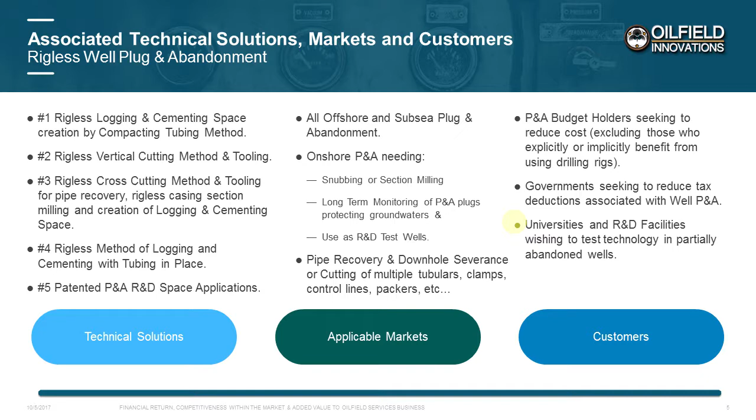Customers for Oilfield Innovations technologies are P&A budget holders, excluding those who benefit from the use of drilling rigs. Governments seeking to reduce tax deductions for P&A, as well as universities or R&D centers wishing to develop new technology, are also very interested in our patents.

In a nutshell, all oil and gas wells are 80 to 90% liquid space within the internal diameter of the casing. Vertically cutting and/or weakening one joint of tubing allows another joint of tubing to be pushed alongside it to achieve at least a 50% compaction rate. In other words, 200 feet of tubing can be compacted into 100 feet of space to leave 100 feet of unobstructed space for in situ cement logging and abandonment cementing.

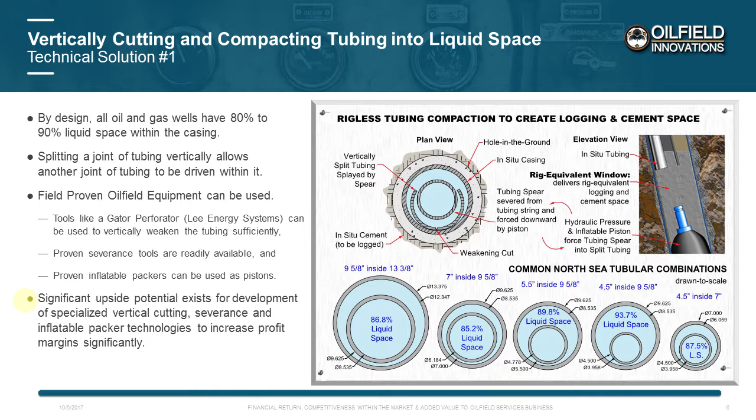One joint of tubing can be pushed alongside another split piece of tubing using an inflatable packer. The remaining uncut tubing can facilitate plug and abandonment cementing. In the short term, field-proven oilfield equipment can be used, and in the longer term, specialized, more efficient equipment can be developed. Humanity has reinvented uses for the wheel throughout history.

We propose using field-proven cutting wheel technology deployed on a skate and hoisted up and down to vertically split the tubing. The tool body can also use a cutting wheel to reduce the friction and partially cut the tubing to create a hinge-like effect that minimizes the force necessary to push one joint of tubing alongside a split piece of tubing.

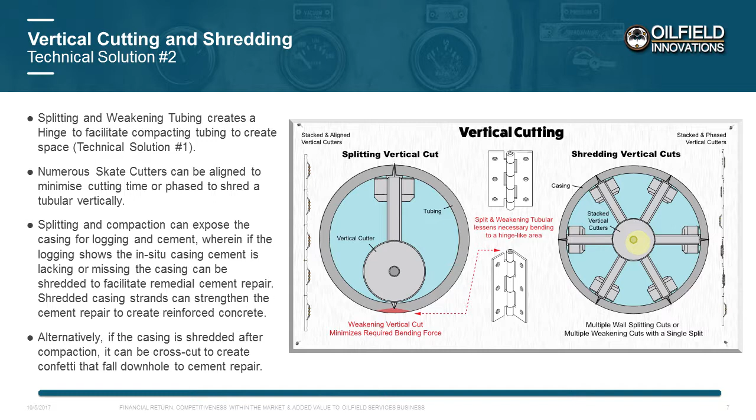Such a tool can also be stacked and aligned to place numerous cutting wheels along a single path to minimize the cutting time. Alternatively, the same tool can be stacked and phased to shred the tubing in many different tracks when lifted up and down.

Vertical cutting using proven cutting wheels can be combined with cross-cutting using a diamond wire filament for in situ casing cement repair and/or rigless casing section milling. Vertically shredding and then cross-cutting turns tubulars and other equipment into confetti that falls downhole. Cross-cutting the tubulars is not necessarily confined to rigless P&A and may be used in rig-based operations to save rig time.

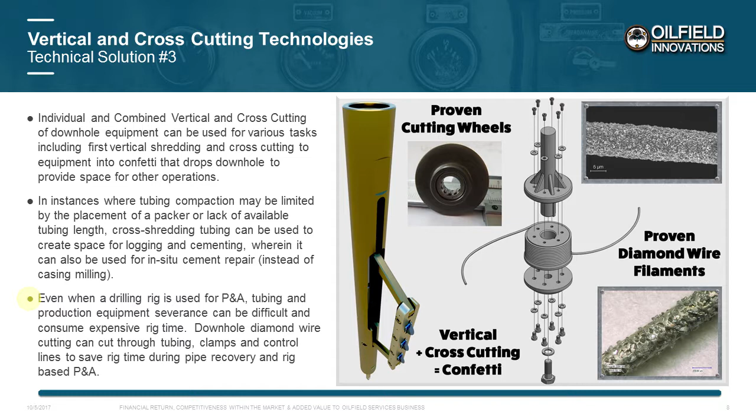Oilfield Innovations' patented diamond wire filament cutter, unlike conventional cutters, can cut through tubing, clamps, control lines, packers, casing, and other equipment deep within an oil and gas well to create space for logging and cementing during P&A, or, alternatively, rig-based retrieval of equipment. Oilfield Innovations have also patented technology for logging and cementing that leaves the tubing in place.

Driving spikes through the tubing into the casing both centralizes the tubing for cementing purposes and can be used to transmit and receive cement bond logging signals. Logging transmitters and receivers can be permanently embedded in cement, with logging signals transmitted through either wire or the casing to surface, for long-term monitoring of the cement plug. This can prove that an effective cement plug was placed and remove all legal liabilities associated with P&A.

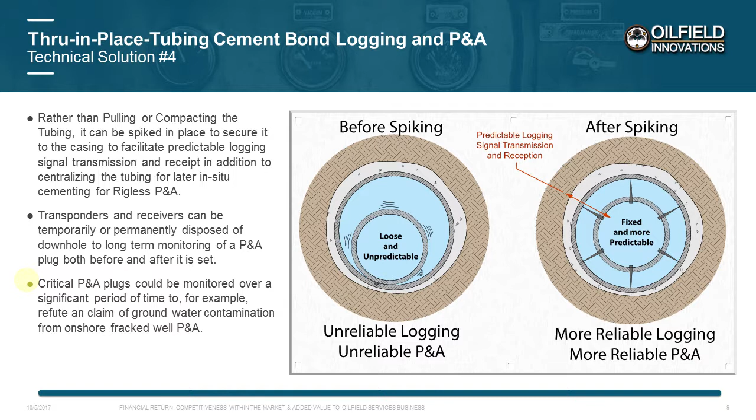The proliferation of unconventional onshore wells and fracking technologies have increased oil and gas company legal liabilities associated with groundwater disputes. But Oilfield Innovations has a solution. Customers generally do not like test well data because test wells are shallow and they do not represent the temperature or pressures where tooling will be used.

Oilfield Innovations have patented the market of converting P&A wells into R&D wells, used to develop new technology to solve this problem. In addition to providing yet another ring fence around Oilfield Innovations' P&A patents, this P&A and R&D patent protects a service company's investment when collaborating with customers, universities, and other companies through a legal monopoly that provides a safe R&D workspace that has similar properties to the wells of final use. Testing in a realistic environment has significant value as it can lower the barriers to entering the market with new technology.

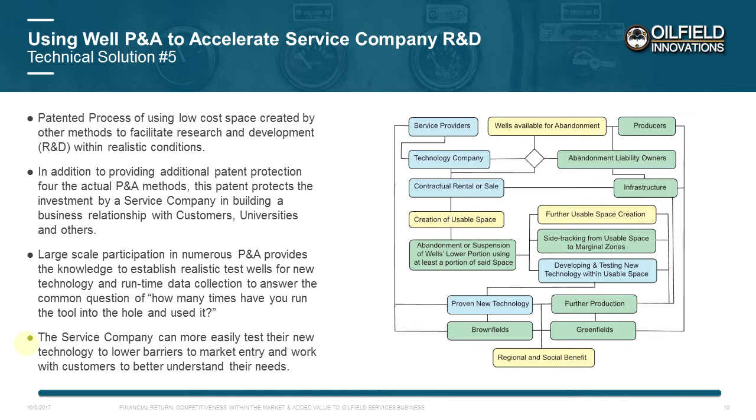In summary, Oilfield Innovations patents provide a legal monopoly for creation of a cementing and logging space within casing using tubing compaction. Step 1 of the process cuts and weakens tubing along its vertical axis. Step 2 severs the tubing and places a liquid soap or cleaning fluid in the well. Step 3 severs the tubing a second time to create a tubing spear that can be pushed alongside tubing below it, which is followed by running an inflatable piston.

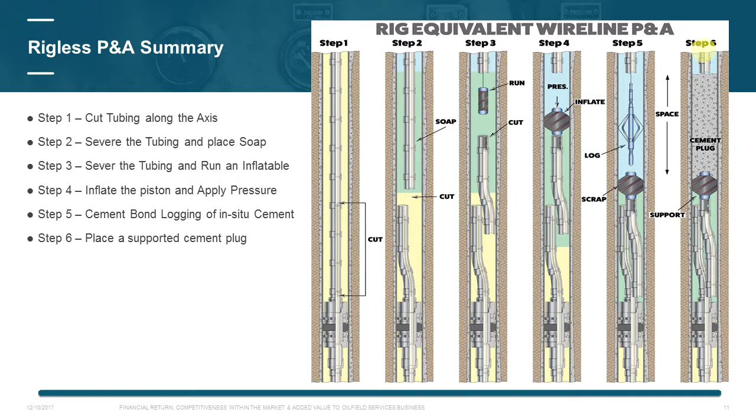Step 4 inflates the piston and applies pressure to compact the tubing side by side to create a space. During compaction, the tubing is lubricated by soap or cleaning fluid to scrape and clean the internal surface of the casing. Step 5 uses the space created by compaction for conventional in situ cement bond logging, which mitigates the legal liability associated with plug and abandonment by proving in situ cement still provides a seal. Finally, Step 6 places a cement plug that is supported by the piston above the compacted tubing, which also provides a seal that prevents gas migration into the cement while it is setting.

As described in this video, Oilfield Innovations has a number of patented solutions to P&A that can benefit operators and service companies.